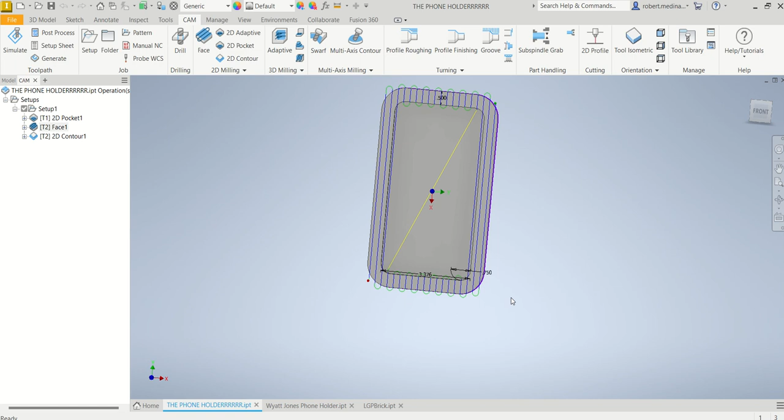Hello, everybody. I'm just doing a bit of a recap and highlight of some examples of cams that I've seen, in case you're stuck, here's a few different methods.

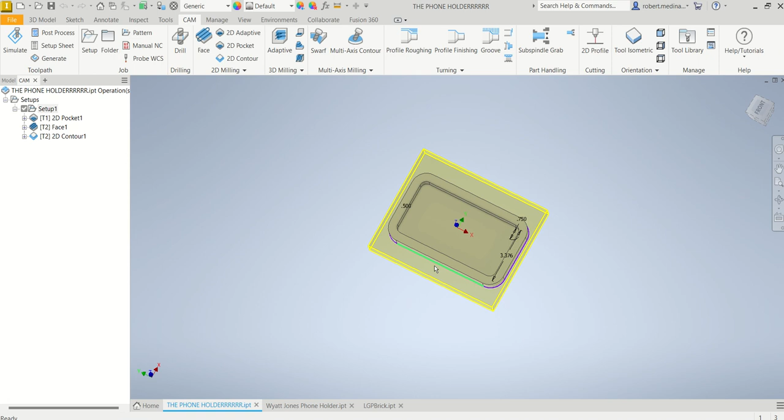The first one, as you can see, we have quite a bit of material on our Y. Let's take a look. You can see this part's at the bottom of the stock.

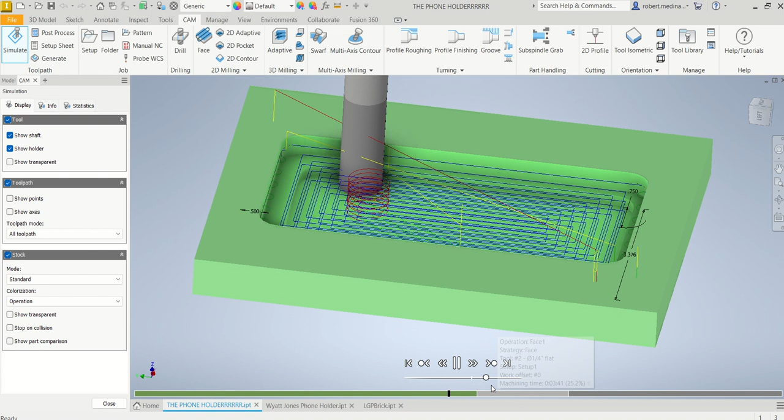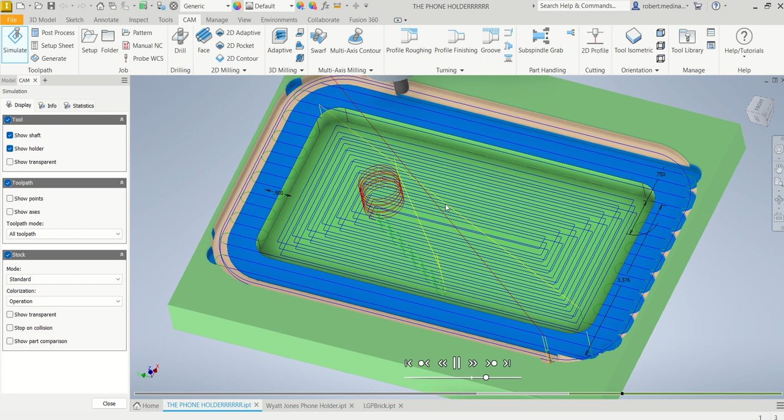So what this student did, we go to simulate here. They started with the pocket first, then they moved on to facing the part to size. And the last operation, they were able to do a 2D contour all the way around the part. What stands out about this example is that they were able to machine the thickness to size, make the pocket, and make the contour all while in one operation.

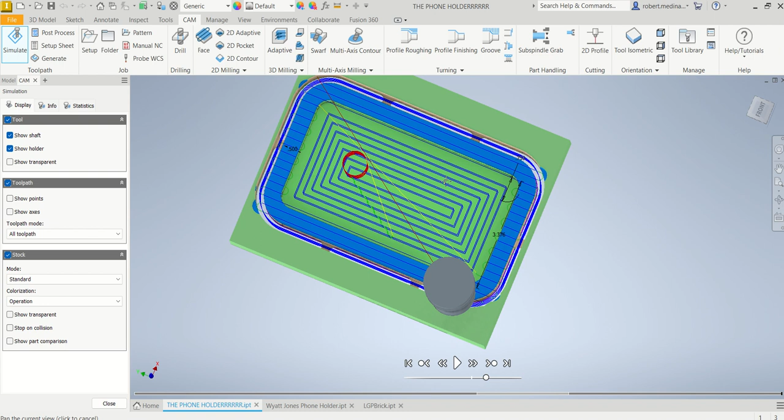As you can see, it's going to work its way down in the contour, and it's going to leave these tabs, so as it works its way around, the part isn't going to drop in. The student only had to bandsaw those tabs off and use a sander to clean up the edges. That's an example of getting this done in one setup.

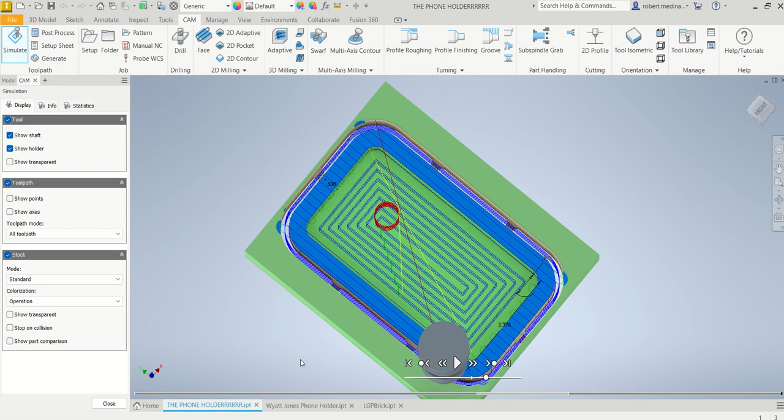Really, you can only do this if you have excess material on the sides here. It's not always going to be possible, but that's how you would use a tab function.

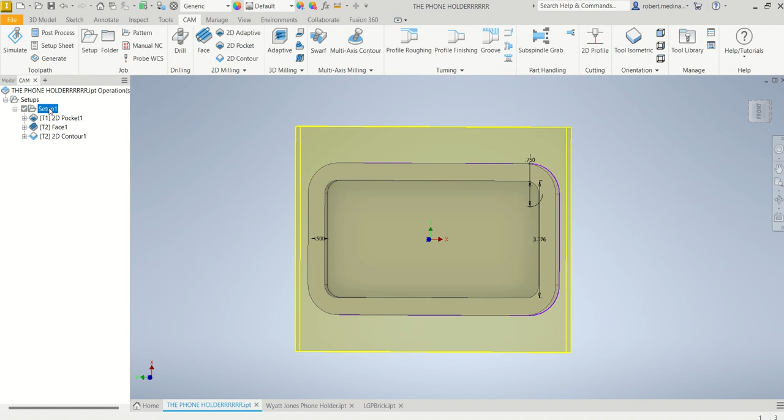So if you wanted to get a tab, you would go to 2D contour and just click this tab function, and it would give you these tabs here. Another thing to point out is that you'd need your part at the bottom here, because if you had it at the top, you would still have all that excess on the back.

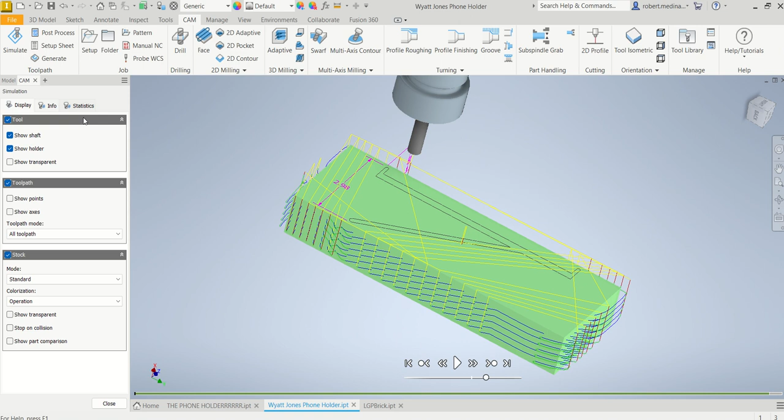So that's one example. This is another student's project here. What stands out about this one, take a look at their setup. Go to simulate. This student was also able to machine most of everything in one go.

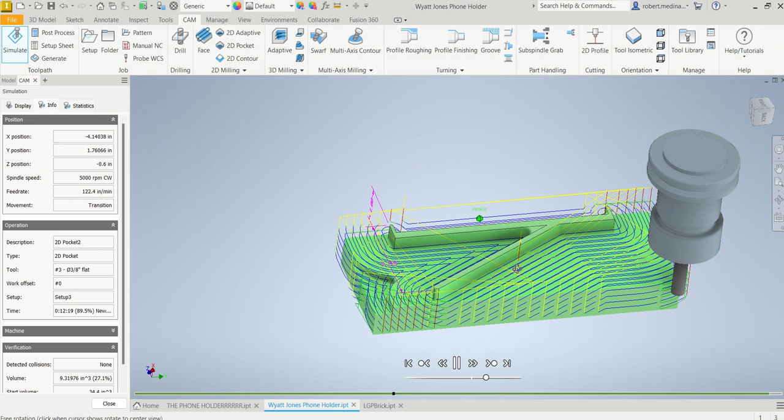They had to start off with a 2D pocket command to machine most of the profile, and it seems they used a 3/8 flat tool. As you can see, because they're grabbing some material towards the bottom, they can machine all of it.

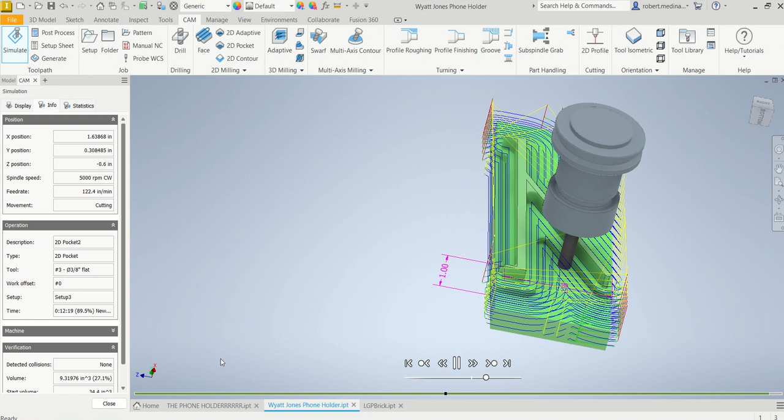The student was able to bandsaw it off as well. Really the big thing here is the 3/8 flat tool - it works its way down until most of that's gone.

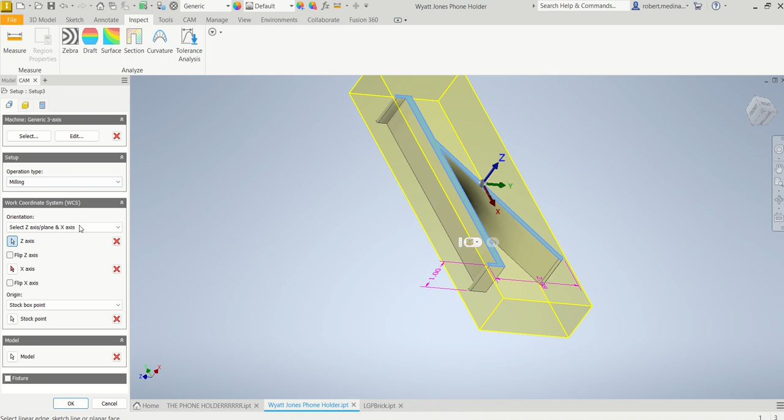So the overall height of the part's 1 inch. If we take a look here, go to inspect, measure - the height of the part is 1 inch. And in the setup, we can see that the overall stock was 1.5 inches. So he milled all of this, and this bottom here is what we were holding in the vise.

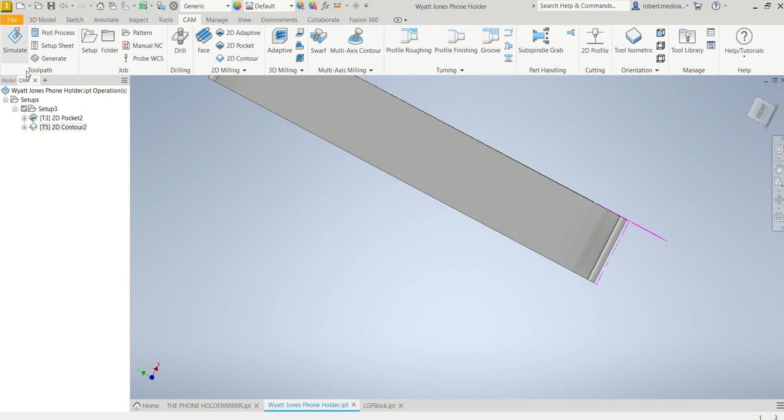That's how you would do that. Really, at the end, all he had to do - let's go to simulate, hit play - it's probably better to do both of them at the same time.

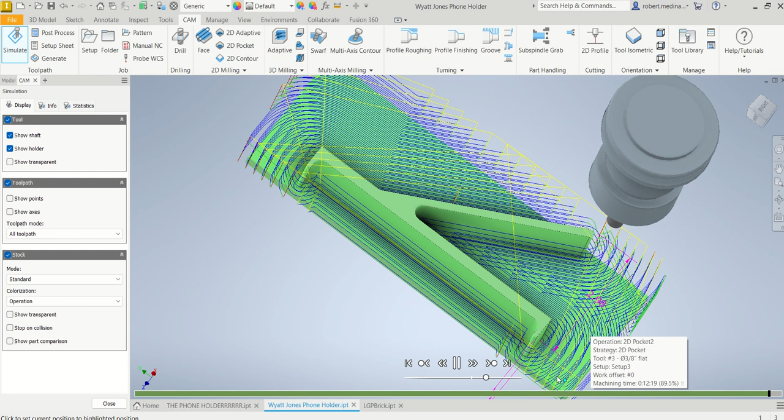So it's going to rough most of that out with a 2D pocket. And then you see how there's some radiuses there - that's because the tool physically can't fit in there. So eventually it switches over to a 1/8 flat, and now you see it cleaned that up a little bit better too.

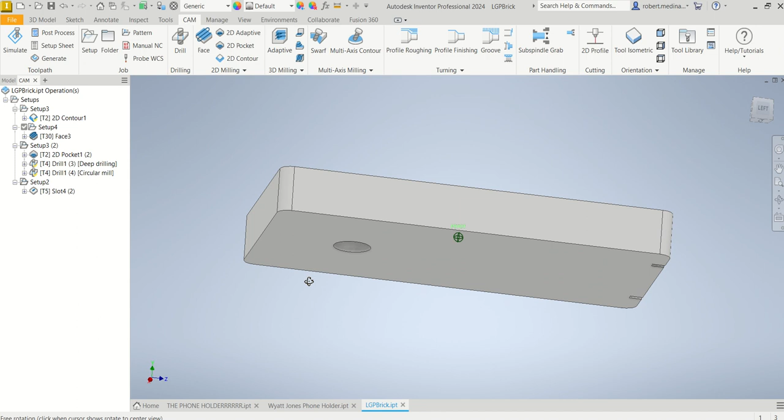So yep, that's another example. This other student did what may not be practical for us in the school setting since we are kind of limited on time, but this kind of represents having multiple setups. I really like this because it starts off with this first setup.

You can see the models at the top, and the student starts by doing the 2D contour, works his way down, and he only leaves what we need to hold this part in a vise.

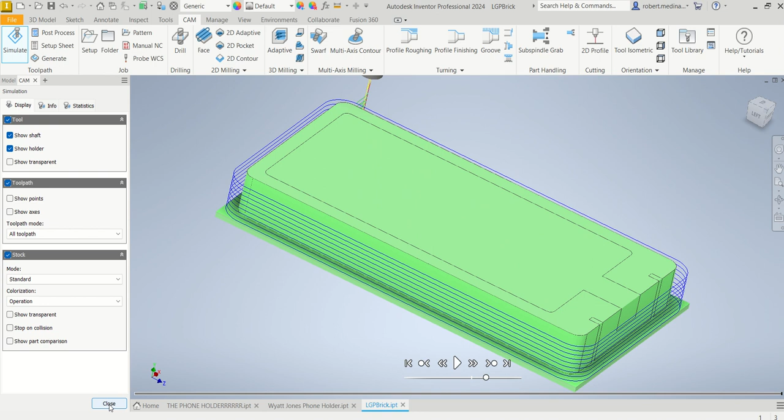So we take a look here, we inspect it, we measure it. The overall thickness of the part is 0.9. If we go to our setup here, it is 1 inch, so it's being held in the vise by 0.1. So he went and flipped it over to get rid of that excess material.

So now we went to a second setup. This is the top now where we need to machine. You see how that's inverted. Now we're going to machine this excess up here.

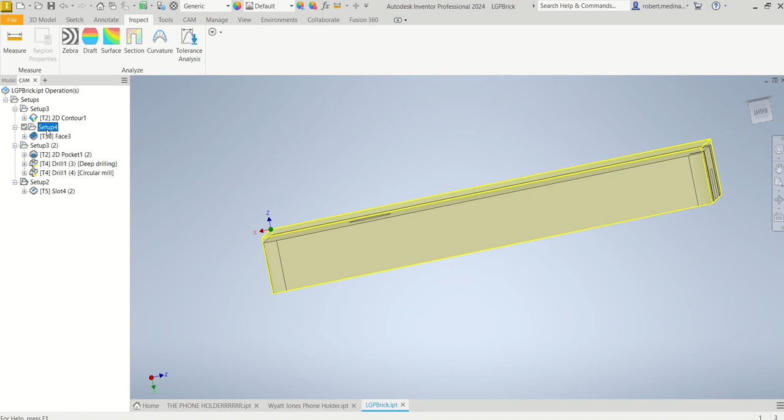So you do that in your setup. Everything else has been machined. In setup one, we have all the excess in our X, our Y, and our Z. So when he went back in, he adjusted that by going to setup 4.

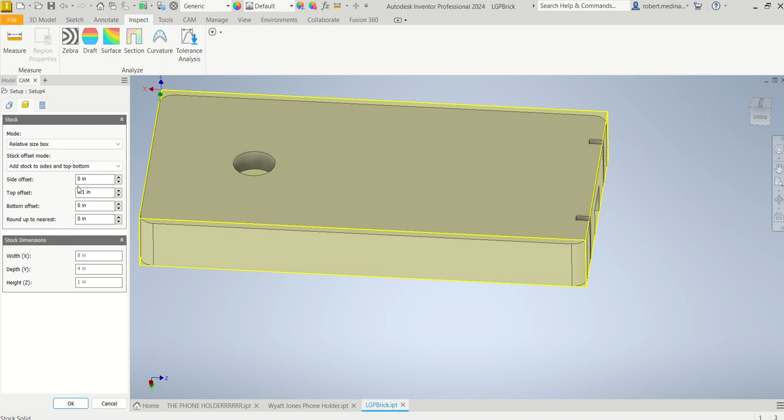He went to the relative size box. There's no excess material on the sides, so he put 0 on the sides. Since in our second setup this is the top, he added 0.1 - so the 0.1 right there. So the machine knows that this model plus the stock is 1 inch.

So he just faced that, and then now he did the third side.

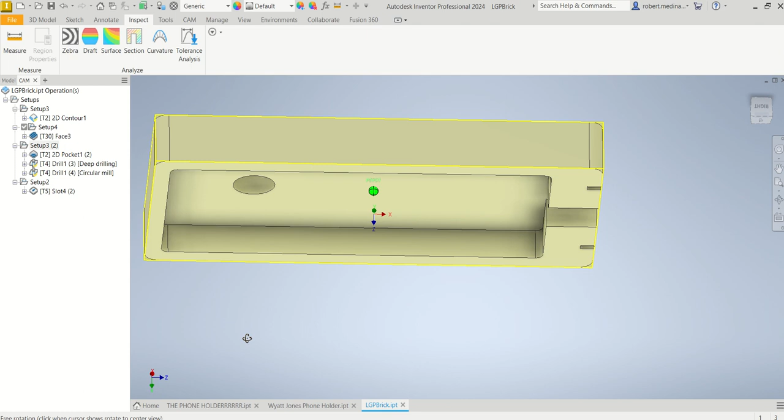So he went back in, and because we're not worried about machining the outside, the student was able to put this part in the vise very deep so we could machine a little more aggressively. So we go to our setup here.

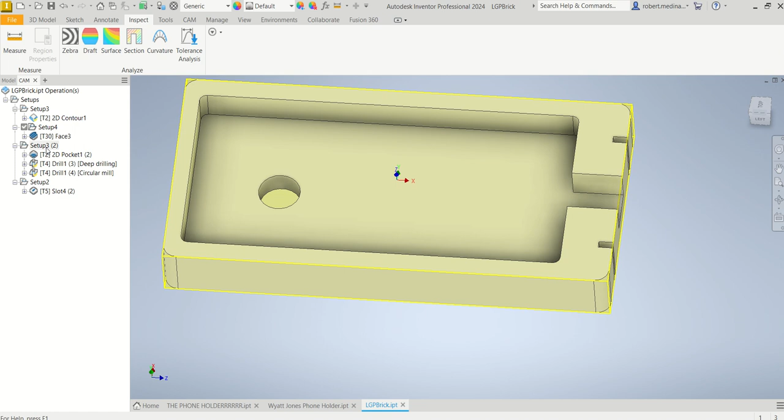This really represents the process of how this part was machined, because now we take a look at our setup here and we go under fix. So there's no excess material anywhere but on the inside of this block here. Hit cancel. Now we can go to simulate, hit play.

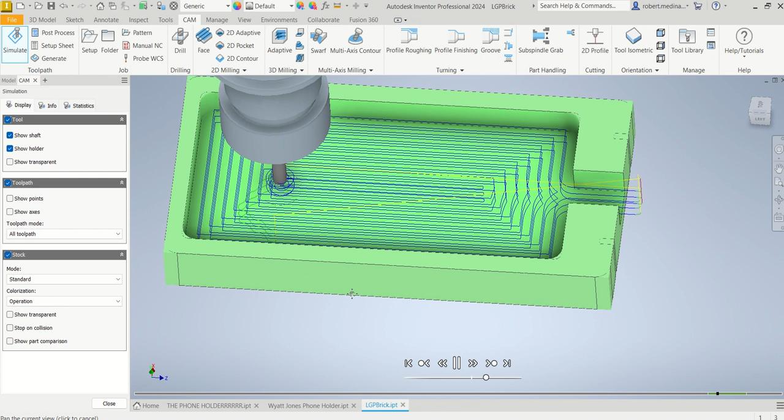So he's just machining the insides there, and he gets all of that, and then he goes in and drills the hole there, and then he interpolates it to size, and cuts all the way through.

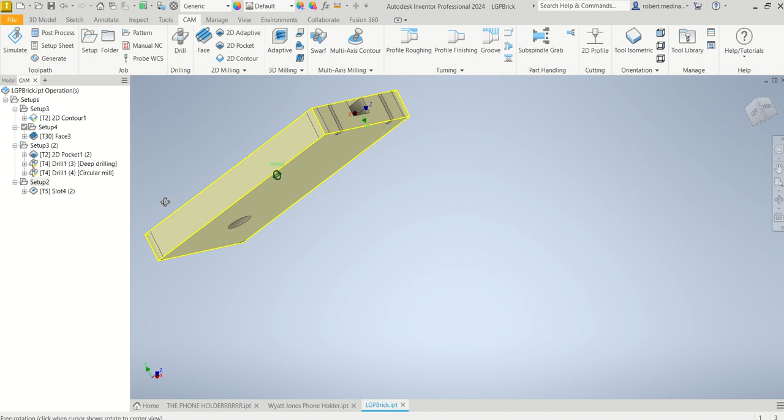Really, you can notice he left this, so that was on purpose. That was our final setup - we flipped the part in the machine, so now this is the top. Yeah, that's multiple setups - just did that side there.

These are just a few examples of how you can approach your project. It just depends on how much material you've got and how you want to do it. This took a lot longer to do just because as we had to flip it over, we had to teach the machine where the part was in the machine.

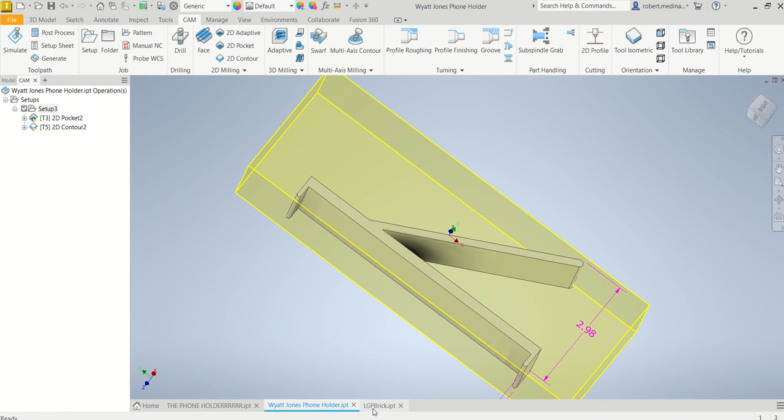Like 1, 2, 3, 4 times. These two examples, we only had to find where the part was once - so these two are one and dones, and this required 4 setups. Yep, so that's pretty much it.